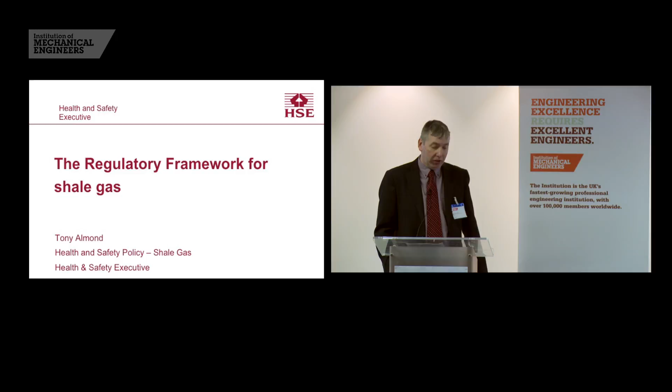And we're one of a number of regulators in this area. It's quite a complex regulatory landscape. It starts with DECC and the licensing people, and we sit in the middle there with the environmental regulators and with the local authority mineral planners. And it's only when we all give the thumbs up to DECC that drilling can actually start on a well.

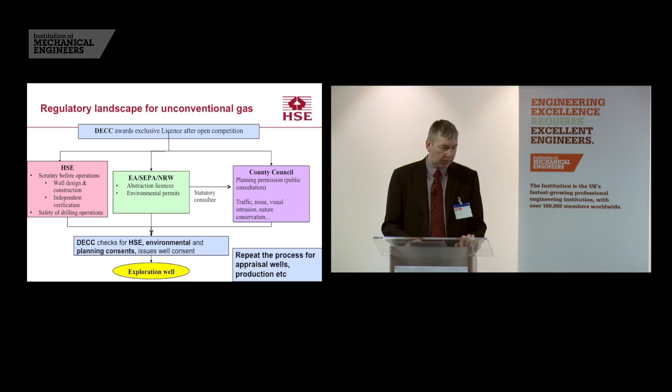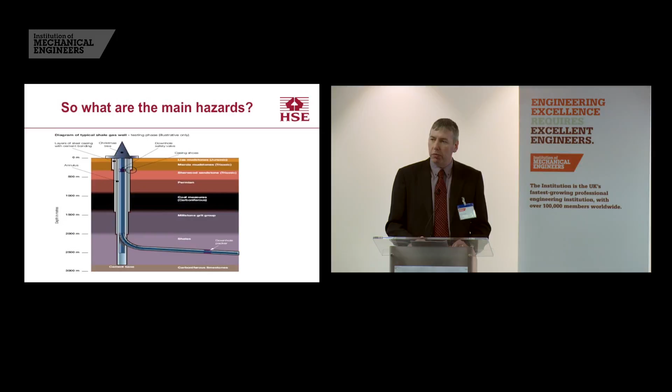Okay, so what are the main hazards? Well, the key hazard for us is an unplanned release of fluids from the well, because that could, if it gets to an ignition source, lead to a fire or explosion. But also, if there is any leak of fluids from the well, that can have environmental impacts both on the surface or underground, and so we are a key part of the regulatory process. And so our regulations are focused on making sure that the well operator is managing that risk.

What regulations have we got? Well, we've got the Health and Safety at Work Act, which I'm sure many of you are familiar with, which gives a general duty on all employers to manage the health and safety risks of their workers or any contractors, or indeed any members of the public that could be affected by that work. But oil and gas wells are complex engineered structures, and so there are specific regulations that sit under the Act that apply specifically to these sites.

First set is the Borehole Sites and Operations Regulations, which came in back in '95. And the key areas from those regulations are that, first of all, before work can start on a well, we need a notification from the well operator, and I'll tell you a lot about what that notification entails a bit later on. And the second part is that the operator must produce a health and safety plan, which includes an emergency plan for the site.

And then there's also the Offshore Installations and Wells (Design and Construction) Regulations, which everybody gets confused about because they see offshore and they think they only apply offshore. Well, the offshore installations bit of it applies offshore, and the wells bit of it applies onshore and offshore. And these are really key regulations because this is the set of regulations that requires the operator to build the well in such a way that there can be no unplanned release of fluids from the well or from any reservoir associated with it, so far as is reasonably practicable, that good old health and safety term.

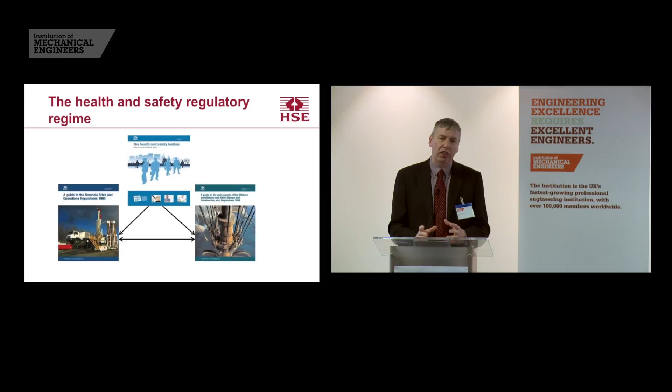But they also go on to set other requirements on the operator. They must report into HSE every week during the construction of the well and during any decommissioning and abandonment activity. And it also sets up a quality control requirement for an independent competent person to be appointed as a well examiner. And this isn't self-regulation, it's quality control, but I'll tell you more about that later on as well.

Okay, so how do we actually do our work? What do we do? Well, it all starts actually with industry standards, and like many other industry standards, HSE contribute to the industry standards for the oil and gas industry. They work with people like Ken's organisation and with Oil and Gas UK to help set the industry standards to ensure that safety is built in at that top level.

And following on from that, we start to look at individual wells and individual operators. And we use what's called a life cycle approach, which means that we start before the well is actually drilled, and we carry it on right until they finish actually decommissioning and abandoning the well. And we don't just do it on our own. We actually work with the environmental regulators, particularly with the Environment Agency. Since 2012, we've had a working together agreement with the Environment Agency, so we jointly regulate shale sites.

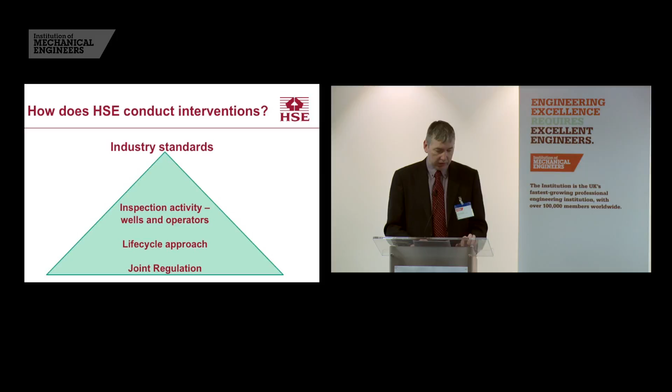Okay, so what is this notification and what does it all mean? Well, part of the information we get on the notification is we get informed about the actual rig that is being used, what pressure control equipment the operator will use, what blowout preventers, and a lot of detailed information about all the equipment that is actually going to be used in the drilling process. And we get that so that we can ensure that they've got the right equipment on site, both to actually drill the borehole safely and to control any type of threat of a blowout or an unplanned release of fluids.

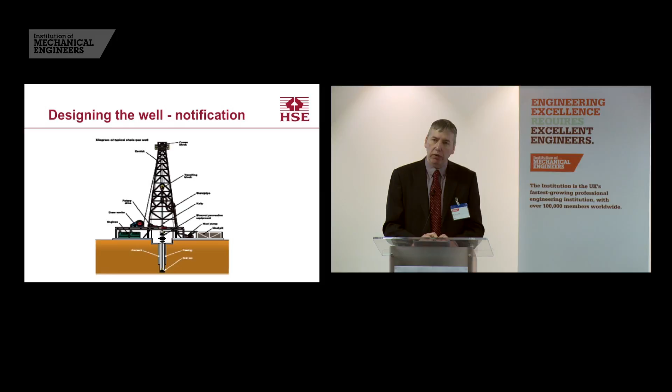We also get information on the programme of work, the timings, and what contractors and people like that will be on site. And we get drawings of the actual well itself, and drawings of the well in relation to any other underground workings, and geological information as well, so that we can ensure that the risks of the well interacting with any other type of borehole nearby or underground mine working are being managed properly, and that the risks associated with the geology, so any type of known permeability or prospect of them hitting gas pockets, things like that, can be managed.

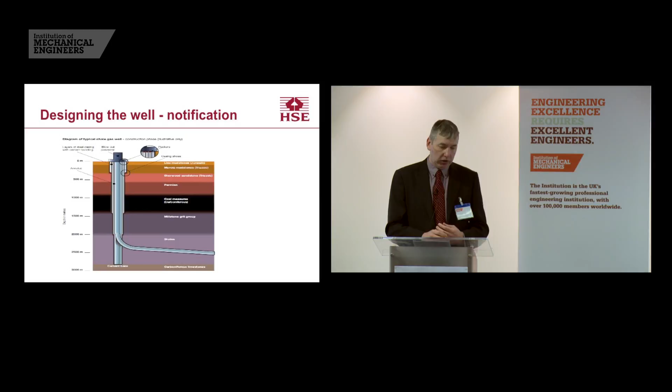So once we've got all that information, our expert well engineers we employ, who cover both onshore and offshore, start to look through the information, and they will pick up any issues that they have. I'm going to give you one example, which is the well at Preese Hall in Lancashire, which is the only well that's actually been hydraulically fractured so far. And before we were happy with the company to start work on that well, we had 5 separate meetings with them and numerous other conversations to ensure that we were happy with the information that they'd supplied and what they planned to do.

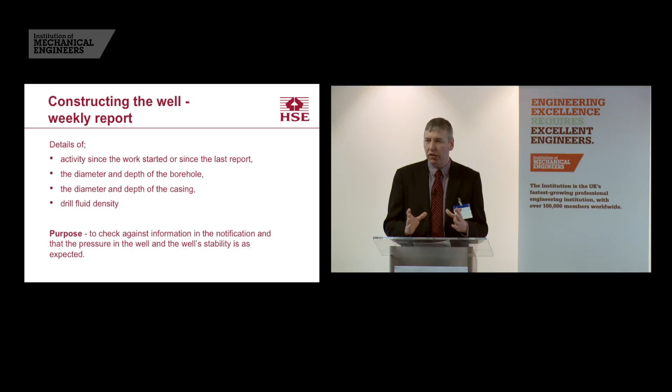When they are allowed to start work on the well, we then get an update from the company every week to ensure that what they're doing matches with what they've told us they're going to do in the notification. And that includes the results of any type of integrity testing or pressure testing that they do on the well, how far they've actually drilled, which is important to understand whether the well is being completed as expected, and importantly the drill fluid density, because the drill fluid density tells us whether the well is experiencing the conditions that we expected at the beginning.

Once the well reaches the end of its life cycle and it's starting to be decommissioned and abandoned, that process starts again. And it also starts again if the operator needs to go back in and re-frack or re-drill the well at any stage. So again, we get a new notification, and the weekly operations reports start again. I won't say too much about abandonment. One thing I will say, though, is that we ensure that the well is abandoned to industry standards, which means that there will be at least 2 cement plugs in the well, which will be over 100 feet in length, and any porous rock strata is plugged above that. So the well engineers tell me that it's extremely unlikely that any fluids would escape from the well post-abandonment if it's abandoned in the correct manner.

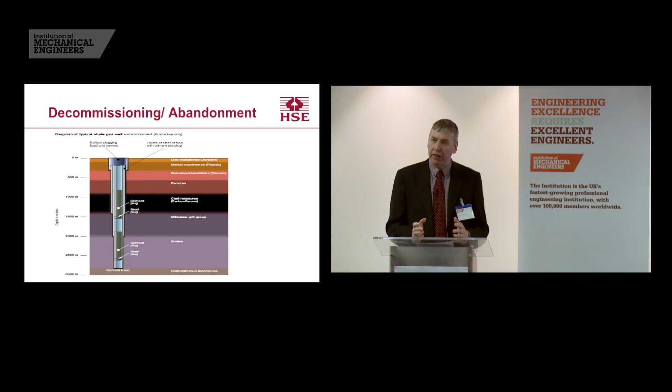And I'll just finish off with a little bit about the independent well examiner, which, as I said before, isn't self-regulation for the industry. It is quality control. It's an important quality control mechanism, and it is part of the regulations. And the reason why some people think that this is self-regulation is because the well examiner can, by law, be part of the same company as the drilling operator. Most quality control people in big companies are part of the same organisation. What the law sets out is a functional separation between these people. And if you look at the onshore industry, all independent well examiners are from separate companies from the drillers. It's not financially practicable for them to employ their own at this stage.

So what we make sure is that the well examiner has got the right level of independence and the right level of competence to do their job properly. And it's their job to make sure that the well is being drilled to the right standards and that the regulations are being complied with as well as ours. And we check that, like I said, we know who the well examiner is, that we're informed, and it's also part of the regulation that we're informed where their records are, so we can check their records if we need to.

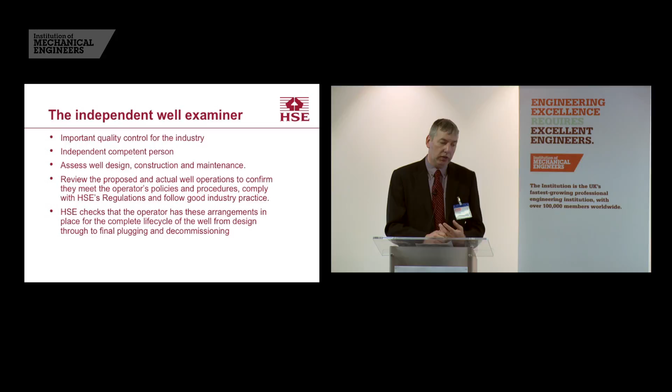Okay, so hopefully that's a little bit about the health and safety regime, a little bit about what we actually do and how we regulate the industry. And it's not just about us sitting in an office somewhere looking at the reports that are sent in. We do site visits as well. We do joint site visits with the Environment Agency that we are committed to as part of our working together agreement. And a little bit about the role of the independent well examiner.

Okay, it's up to you to decide. Okay, thank you, Tony. Thank you.